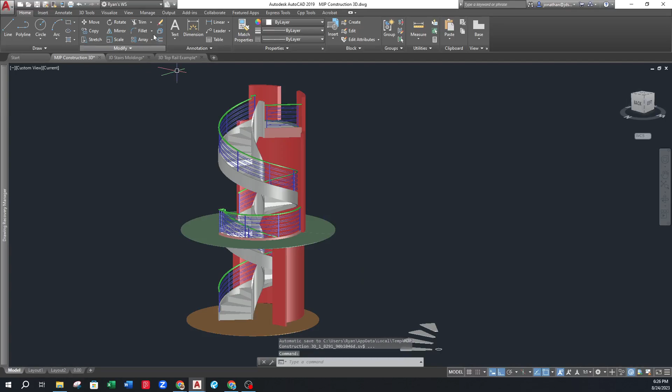This was just a stair that a client sent to me, and he was having some problems getting this rail to work. And so I thought I'd make a quick video on it. So I just copied these same treads over here just so we don't have to have a whole other model in our model while we're working.

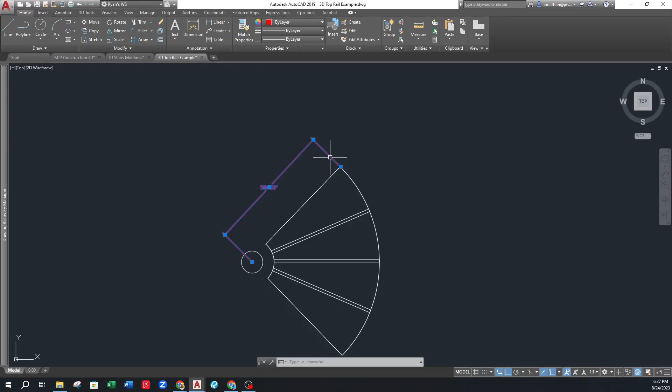So the first thing you want to do is you want to find out what your radius is, or wherever you want the center of your railing to be. So in this case, we're just going to use the outside edge of the tread for ease. But if you had a handrail that was here, if it was, let's just say it was 1 inch in, you'd want a radius of 57, if that makes sense. But for the sake of this, we're just going to go to the outside edge so you can see.

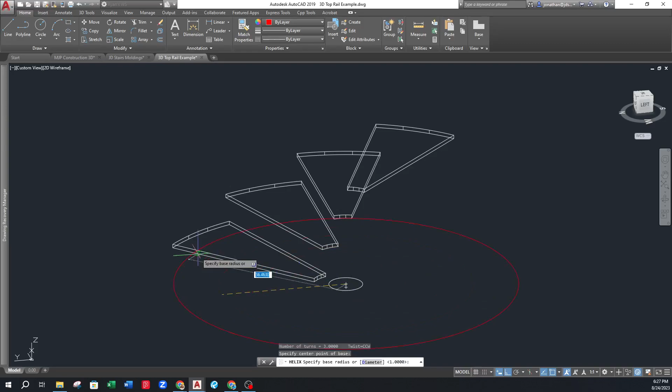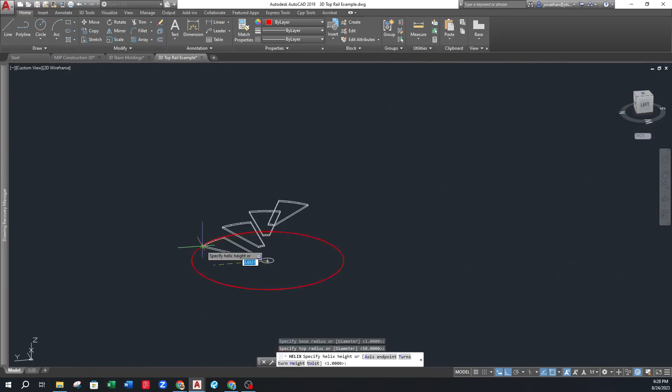So the very first thing you're going to want to do is you're going to want to draw a helix. And you want to make sure that you start your helix where you would want your handrail to start. That's really the only thing that you need to make sure of when you're doing this. So it's just asking me to specify the top radius or the diameter and the bottom radius or the diameter. Now, those don't really matter because you can change those in the properties later.

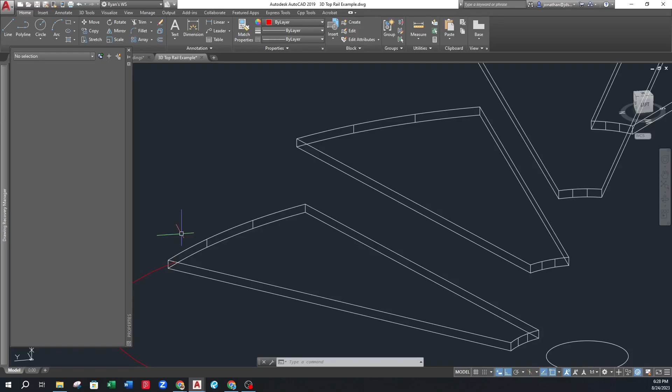Even if, let's say, I decided that I didn't want my rail to be to the outside edge, I could come here to the properties and say that I want the base radius to be 1 inch in. So I'm going to go 57, and the top radius, obviously I want the same, we'll say 57. And then now you can see that that is 1 inch in. You can also see that this is going counterclockwise, which is the opposite of how our treads are. So we can change that in the properties as well.

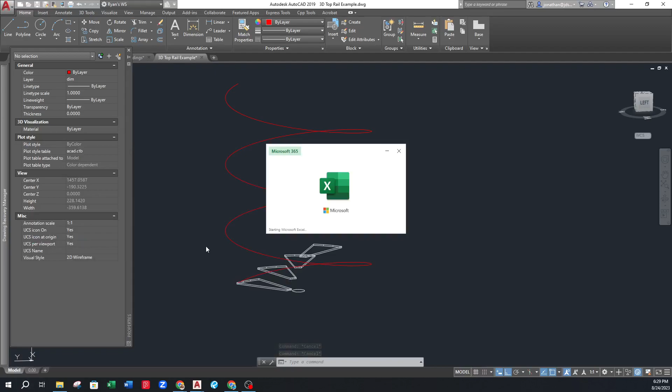Now this is the part where we have to use what we call our weight calculator or our spiral calculator in order to get our helix to what we want. So I'm going to go weight calculator. And this specific spiral had 16 treads around. The rise was 134.125. So this would be my helix turns. So let me see if I can do this. It's probably not going to do it on both my screens, but

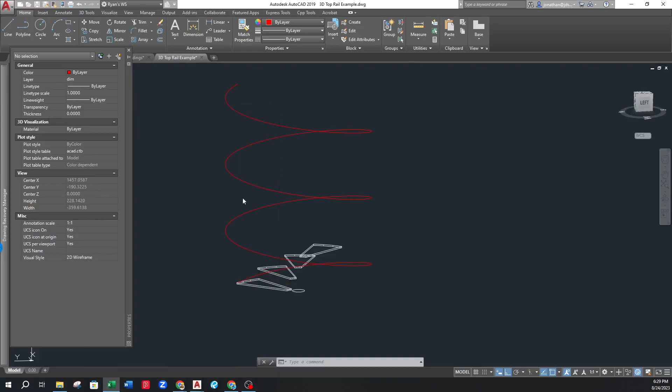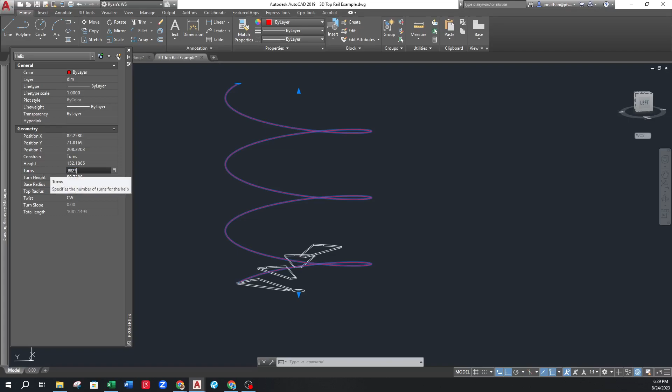so right here where it says turns and it says currently 3, oops, that's not what I wanted. You would want to put this 0.882353. So we're gonna go 0.882353, and we're gonna hit enter. And obviously this is not the height we want, so now we play with the height. So it's currently at 152. So let's try 118. And then that looks pretty dang close.

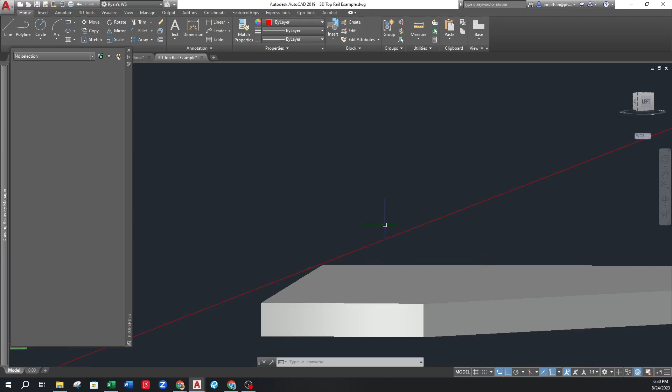Now you don't want it to be intersecting the tread, but you want it to be just right at the nose or right above the nose, because again, this is going to become your top rail. So the closer you can get that without it going through the treads, it's going to give you a better result. It's going to be more accurate. Okay, so now we have our helix. I'm going to move this out of the way here.

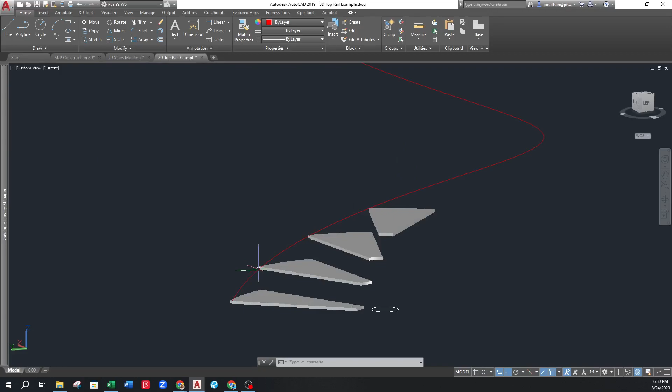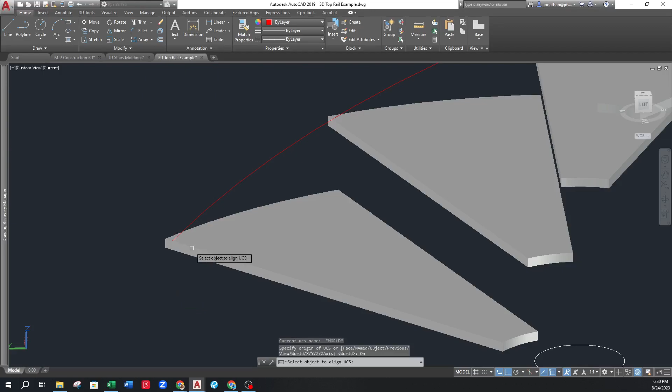So now what do we do? Well, we have to align our UCS with where we want our rail to start, which would be here, right? So let's see what it's doing right now. So you can see when I draw a rectangle, that is not the view we want. So how do we align our UCS? So on mine, I can hit 5 and select an object to align my UCS. But if you don't have that, which you probably don't, but in our company we do.

So you can type in UCS, and it's going to ask you to reassign the UCS origin. So we're going to put it right here. It doesn't really matter as long as it's along this plane. So I'm going to put my X this way. I'm going to put, oops, I don't think that's what I wanted. I think I wanted my Z to go back, yeah. So I'm going to do that one more time. I want my X here. Gosh dang it, why can't I get it? I want my X to go this way.

It's not working. It's giving me fits, isn't it? Okay. What is happening? Here I am trying to teach and it is not working. Okay, there we go. That's what I want.

So when I draw a rectangle, you can see that now it's drawing it on the same plane as the front of where I want my rail to start, or in this case, the front of the tread. So we're going to go ahead and just draw a rectangle. Let's just go 2.5 by 1.5. Okay, so this is where the magic happens.

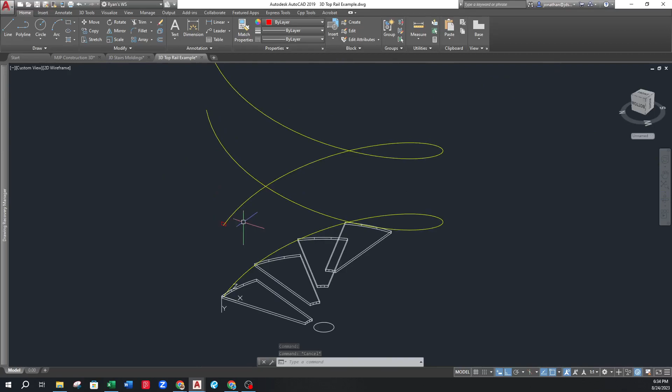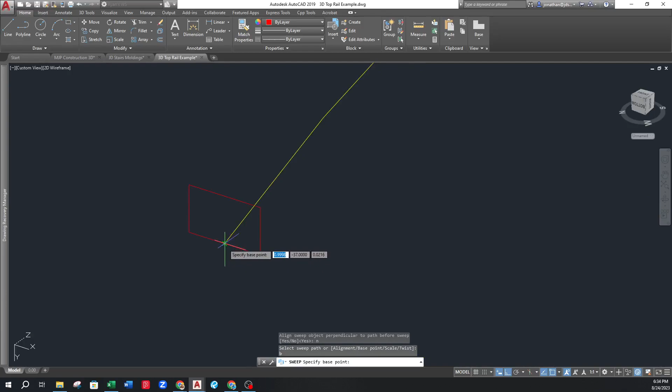Okay, so now you're going to type in the command sweep. You're going to select what object you want to sweep. Then you're going to come down here to where it says alignment, or type in A, and you're going to hit no. Then, before you do anything else, you're going to type in B for base point, or you can click this as well. And now you're going to select that point where those two are meeting.

Okay, now it wants you to select the sweep path. So you're going to select your helix. And what that's going to do is keep your rail nice and flat and not twisted, not distorted or skewed in any way.

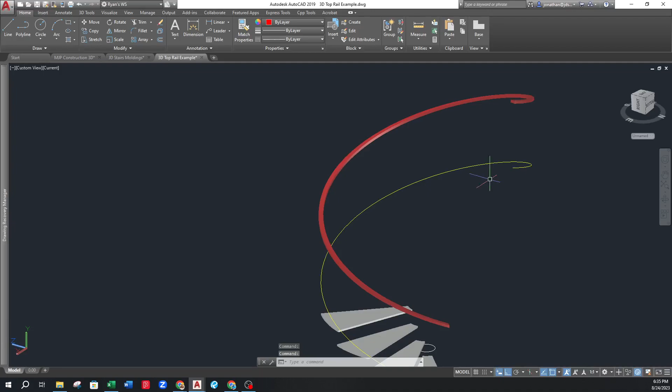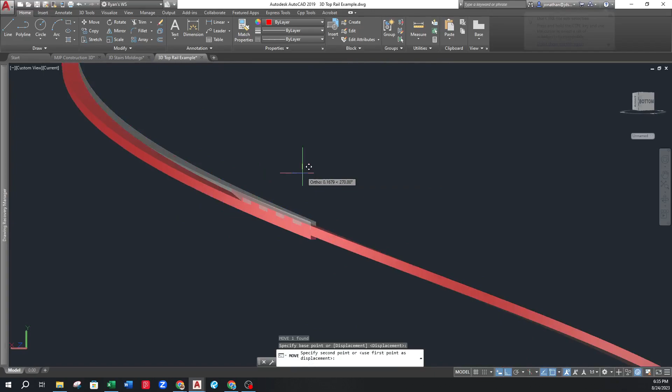And a good way to check this is, I'm going to have to pull this out a little longer because I didn't draw mine quite long enough. A good way to check this is if you can take this rail and copy it straight up, and I'm just eyeballing it here. If you can copy that rail straight up and it provides a seamless transition between where you started and where your rail that you had extruded originally ended, that's how you know your rail's not skewed. It's going to be perfect.

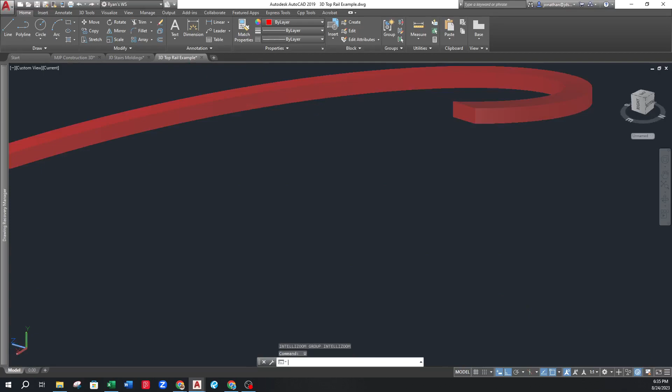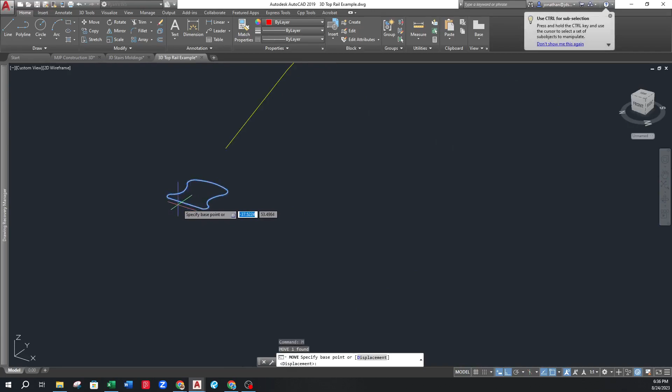So I'm going to do it with another shape really quick just so you can see how easy this is with, let's just say, a molded rail, any type of wood rail. Let's see. Make sure my UCS is good. Okay, and then I'm gonna paste this. And I'm not sure if I'm gonna have to rotate that vertically or not, but we're gonna try it without it first, and then we will see.

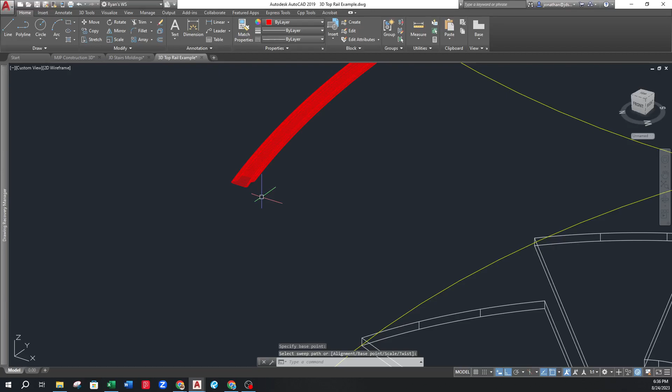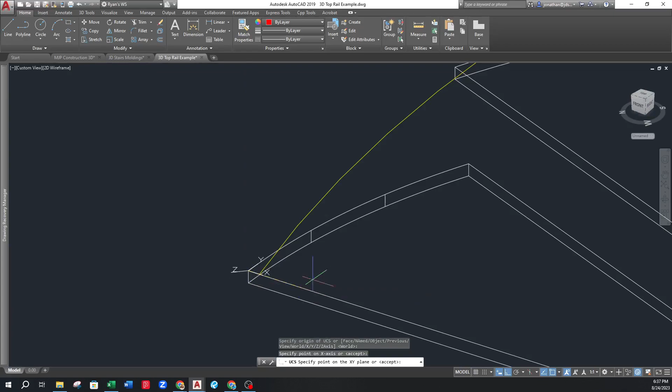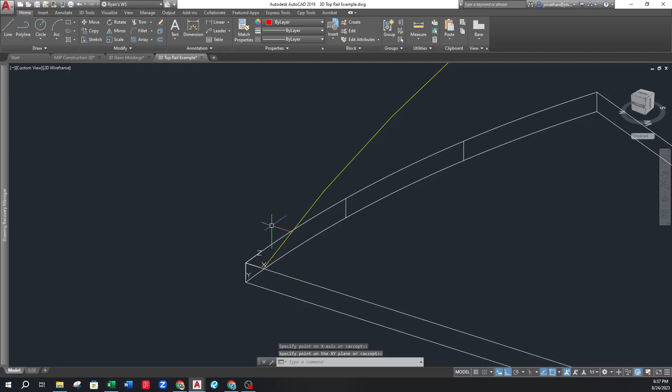We'll see if it goes. I'm not sure. Oh, please don't freeze. Yeah, I think I might have to rotate it vertically. Oh, that was not vertical, was it? Oh, that's why, because my UCS is all messed up. I don't know why my UCS is being so finicky today. Okay.

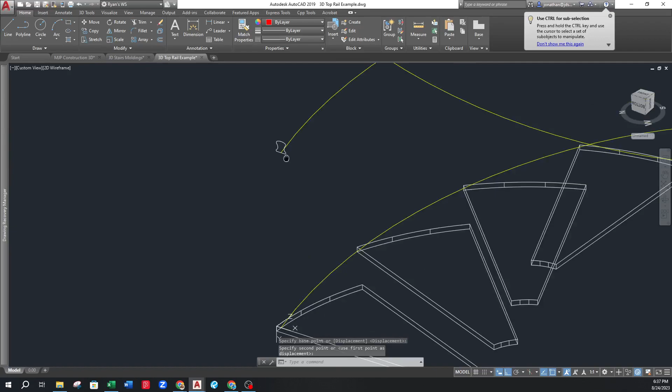Okay, so I don't know why my UCS was messed up, but you can see it pasted upside down, so then I just mirrored it. So you can see it's still along the same plane as where I want to start my rail. So I'm going to take this and put the bottom of this here, and then I'm going to do the same thing again.

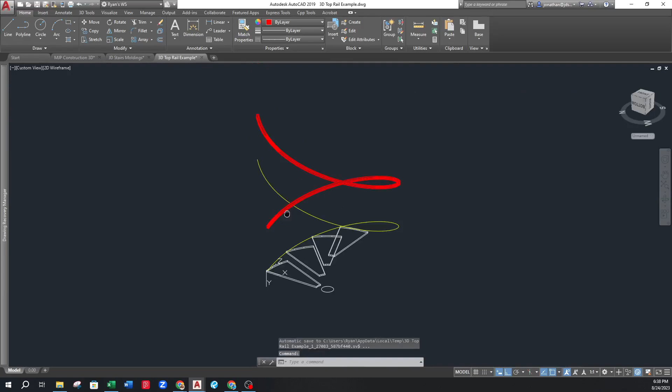I'm going to type in sweep, select the object I want to sweep, A for alignment, I don't want it aligned, B for base point, select here, select your helix, and then you can see that it's nice and unskewed. Perfect top rail, literally 10 seconds from the time I got it pasted in the right way to the time I have a fully extruded wood top rail.